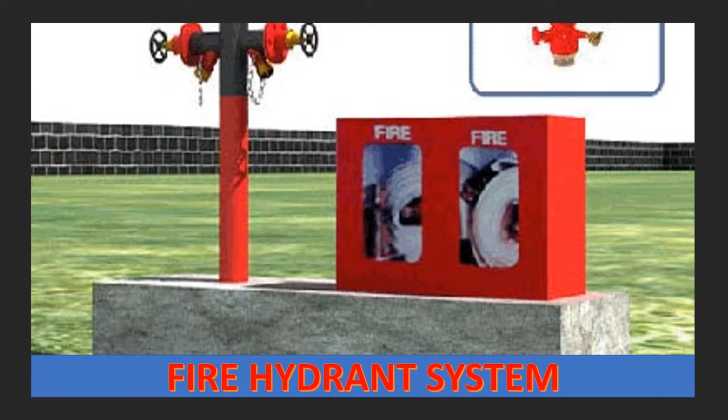From the last few years, fire accidents are increasing widely in India due to various reasons. Ignoring those facts and moving forward will not help us in any way. Let us pause a few minutes and learn the importance of having firefighting system knowledge within us to safeguard ourselves and to safeguard our near and dear ones. Come, let us see in detail.

Due to the repeated fire incidents happening in India, the rules and regulations of the fire departments are amended regularly. So many times fire starts in a small way due to carelessness and it leads to a big destruction. On average, the fire will spread in a big way in 3 to 5 minutes. So the earlier we act, we can protect ourselves and protect others.

Due to the direct and indirect impact of fire, we have lost so many human lives, huge properties and bigger businesses. So let us focus our energy to learn more about the firefighting system so that we can contribute to others in saving their lives as well as their assets and business. Government of India is upgrading the team strength and equipment strength to reduce the loss of human lives, business and property by acting fast to the fire situation.

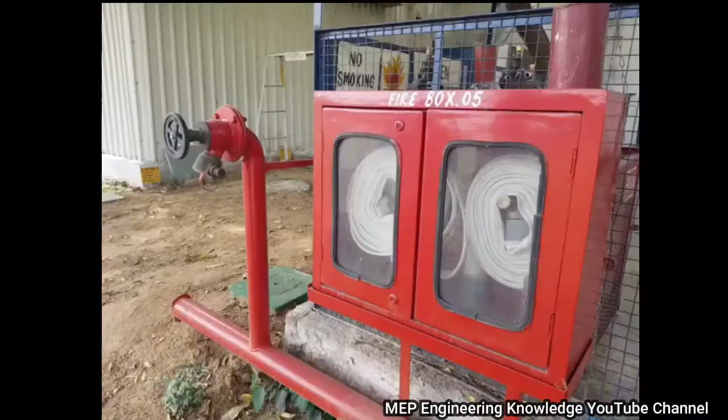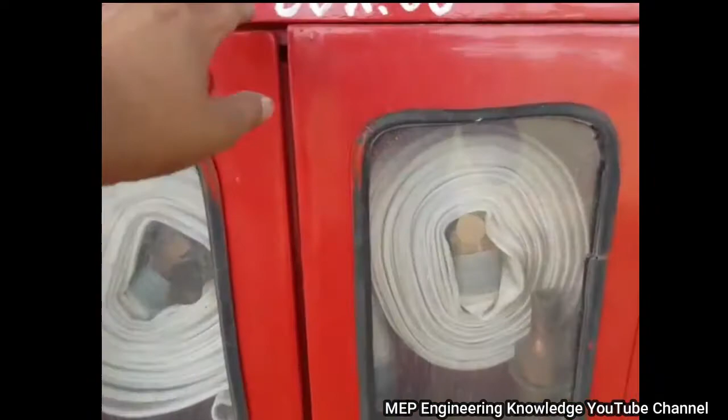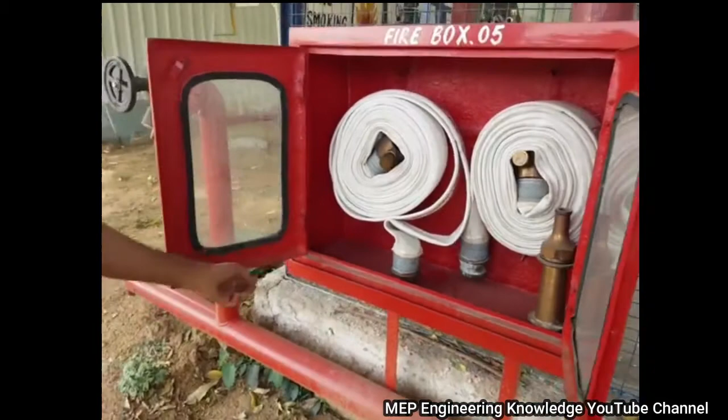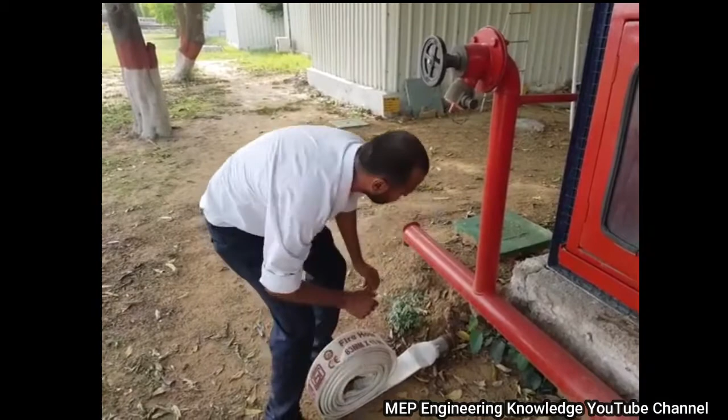Come, let us see a live video of how to use the fire hydrant system. You can see a landing valve. In this landing valve, there is a knob which is used to connect the RRL hose. The RRL hose will always be kept inside the box to protect it from damage and for emergency use. You can see how the RRL hose is taken from the hose reel box, and it will always be kept in a rolled manner.

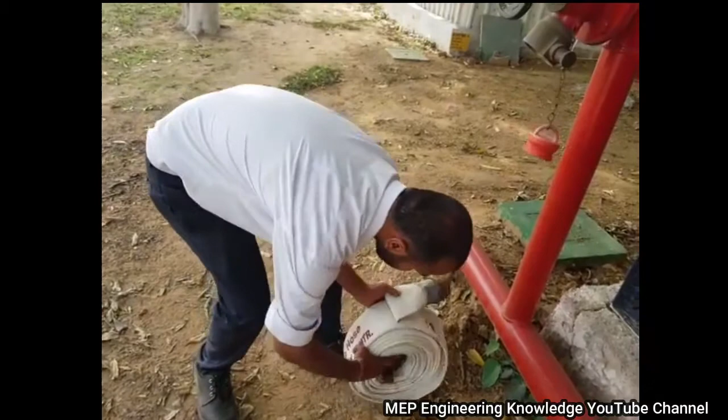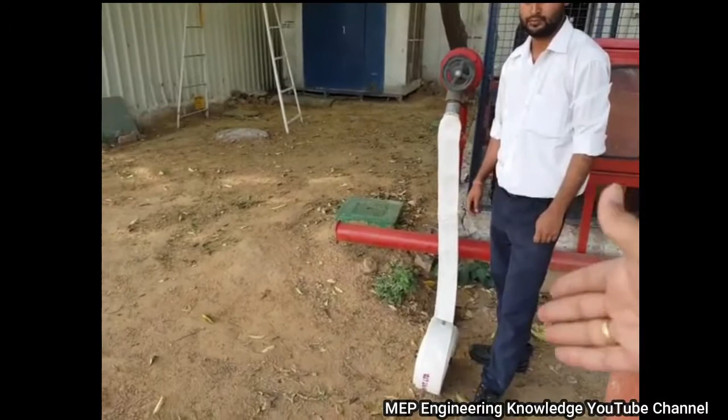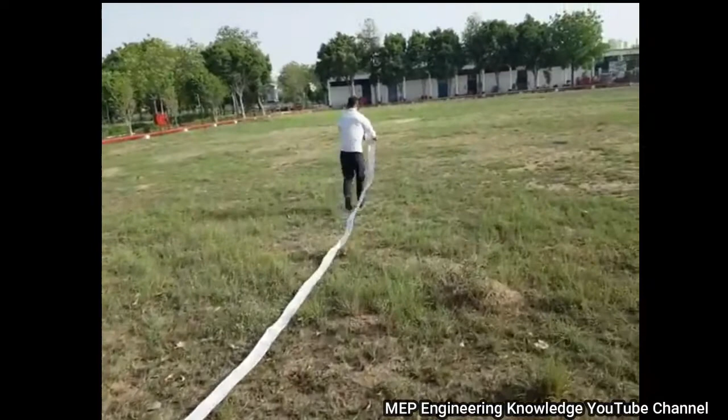So by pulling the lock, you can remove the end cap of the hydrant valve. See, just by pulling the knob, you can press the hose inside the landing valve. Then you have to simply roll the hose, or you can hold it at the center and move on. It will rotate automatically without any twist on the hose pipe.

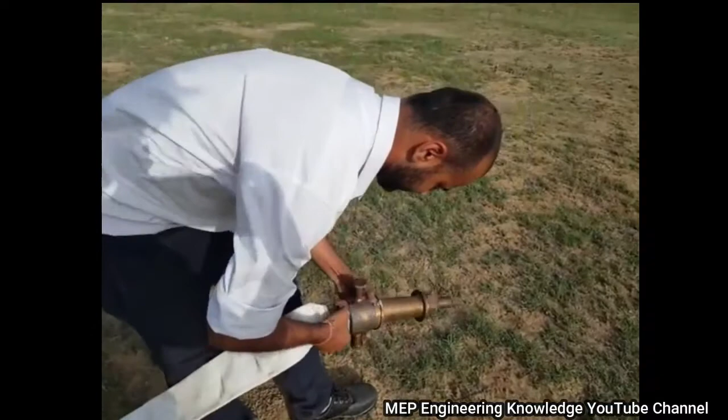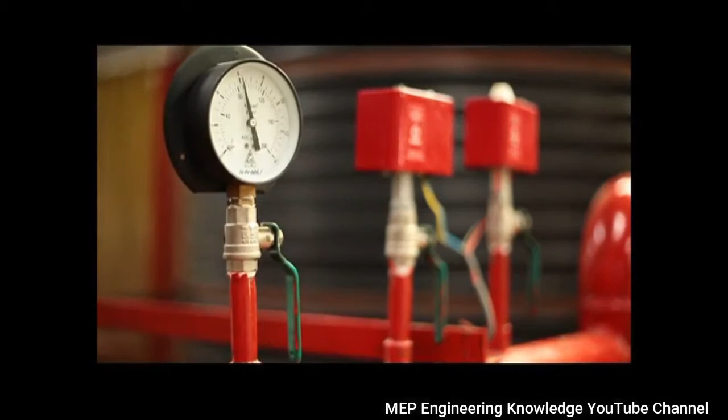This is the nozzle which is kept. Just see how the nozzle is connected to the end of the hose. Same way, you need to pull the lock to insert the nozzle. You can see in close up how the nozzle is fixed in the hose reel. Once the pump is switched on, you can see the pressure is increasing. That can be monitored in the pressure gauge. Here you can see the pressure of the water which is coming out from the nozzle.

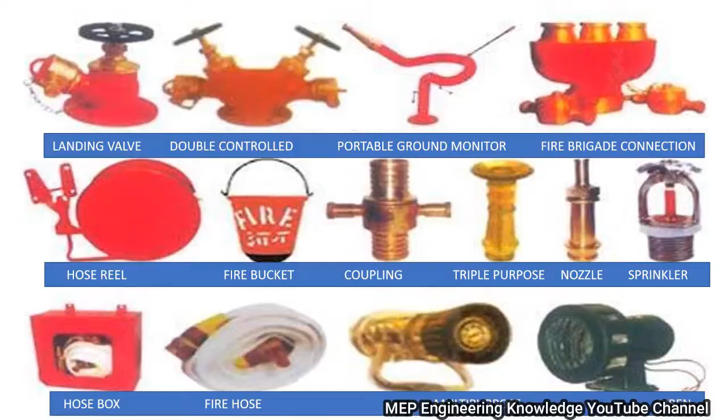To handle the hydrant system, proper training is required. In the fire hydrant system, we have many parts and accessories included. So let us learn their usage and importance, so in emergency time it will help us a lot. Let us see the hydrant system parts. First is landing valves. Landing valves are used in the wet risers in buildings for firefighting purposes. Trained people connect the water hose to the valve to get the water to extinguish the fire.

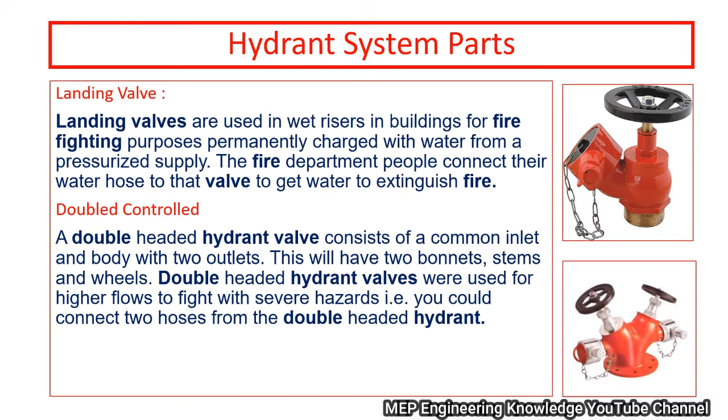Next one is double-headed hydrant valve. The double-headed hydrant valve consists of a common inlet and a body with two outlets. This will have two bonnets. Double-headed hydrant valves are used for higher flow to fight severe hazards. This will be used only by trained technicians.

Fire brigade connection. This will be accessed only by expert trained people from the fire department. The one inlet of the fire brigade connection will be connected to the pumper truck of the fire department. The water from the vehicle will be pumped through this inlet, and from the other outlets the RRL hose will be connected and used to extinguish the fire. The next one is hose reel box. The hose reel box will generally be used to address or extinguish smaller fire events.

So it will be a 25 mm dia hose which you can pull up to 30 meters long. So anybody is able to handle the hose reel to extinguish the fire. It will have high pressure, but it will be in a controllable manner. We will have a valve with which you can control the flow of water.

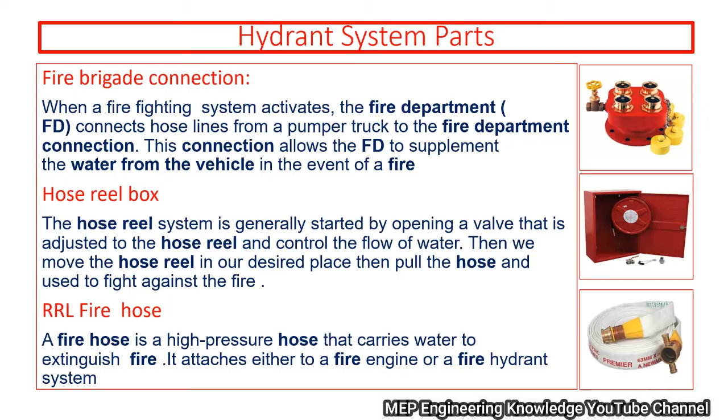The next is the RRL fire hose. This is a high pressure hose that carries water to extinguish fire. So mainly only trained or expert people are able to handle this pressure. So it is recommended to get trained before you use this RRL hose. Available in 7.5 and 15 meter. It will be connected to the fire brigade, landing valve, etc.

Portable ground monitor. The advantage of these units is high water flow up to 1250 GPM, depending on the supply hose and nozzle selection. This can be operated by a man or it can be operated without manual effort as well.

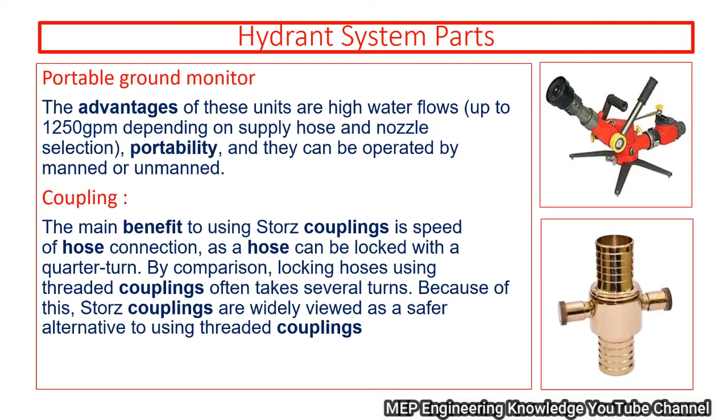Next is coupling. During a fire emergency, we will not have time for threaded couplings. So to avoid the threaded type, Storz couplings are used. This has a lock system. By inserting, you can turn a quarter turn and it will get locked. This will save time and help the expert extinguish the fire in an easier way.

The next component part we are seeing is the nozzle. The nozzle is one of the important parts in the fire hydrant system, to create more pressure and to reach the distance. Due to the reduction in the cross-sectional area at the end, its flow velocity increases considerably so that the water can reach the farthest distance.

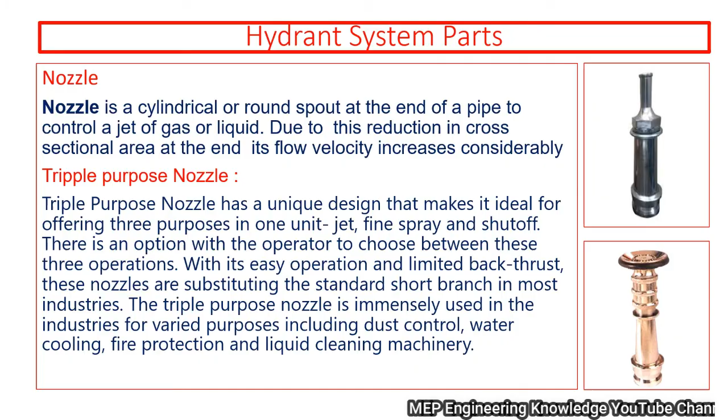Now another one is the triple purpose nozzle. The triple purpose nozzle has a unique design that makes it ideal for offering three purposes in one unit: jet, fine spray and shut off. These will be handled only by the expert trained firefighting team.

The other part of the hydrant system is the siren. A siren is a loud noise making device. When a fire incident happens, the siren will make a noise and alert the people to vacate the building immediately. The next one is the hydrant gong bell. Typically located outdoors, connected to the fire risers, encouraging prompt evacuation and emergency response.

The evacuation time is generally between 7 to 10 minutes from the building. The evacuation time is defined as the elapsed time between the instant that occupants receive an alarm or become aware of the fire, and their arrival at the destination, which is normally a safe location inside or outside the building.

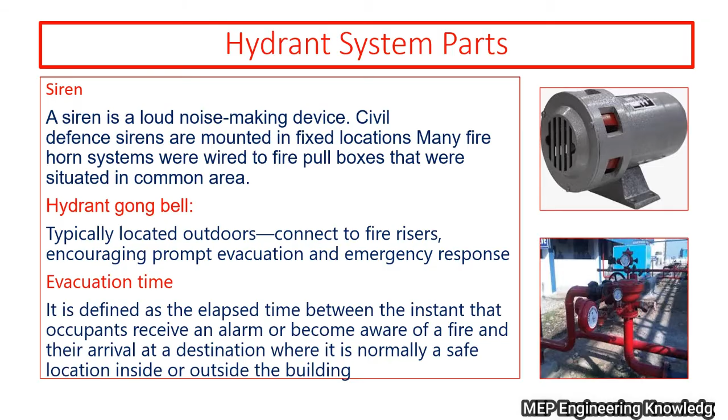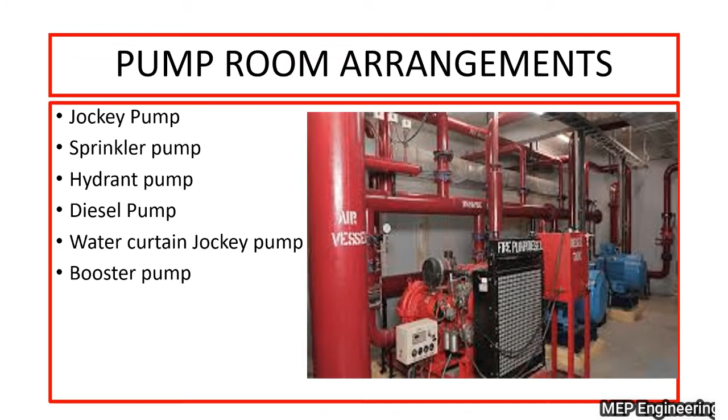Let us see the pump room arrangements. There will be a jockey pump, sprinkler pump, hydrant pump, diesel pump, water curtain jockey pump and booster pump. The booster pump will always be located at the terrace of the building. So this is the arrangement in the pump room. In the next video we will see in detail the technical calculation of the capacity of the pump and the capacity of the water tank to be designed for a particular building.

A small drawing is shown here for your overall understanding of the pump room layout and how the pumps will be positioned in order. Here in this table you can see the pump operating pressures. The jockey pump, sprinkler pump, hydrant pump, diesel pump and water curtain pump are shown here. The jockey pump is the primary pump. When any small pressure drop happens, the jockey pump will try to cope with that pressure drop and keep the set pressure alive.

For example, if the set pressure of the building is 6.5 kg per centimeter square, the jockey pump will turn on when the pressure drops to around 6. From 6 to 6.5 the jockey pump will not respond. Once it comes down to 6 kg per centimeter square, the jockey pump will automatically switch on. And once 6.5 kg pressure is maintained in the system, the jockey pump will automatically cut off.

Whereas the sprinkler pump and hydrant pump will not have a cut-off system. Once they start, you have to switch them off manually. So even after the jockey pump starts, if the pressure is unable to reach 6.5 and keeps reducing, when the pressure reaches 5.5 kg, the sprinkler pump will turn on. Similarly, if some expert opens the hydrant valves, the pressure in the hydrant system will drop so that the hydrant pump will turn on at 5.5 kg per centimeter square.

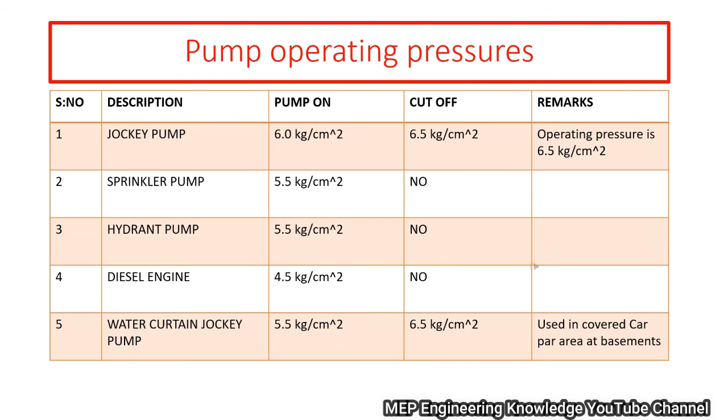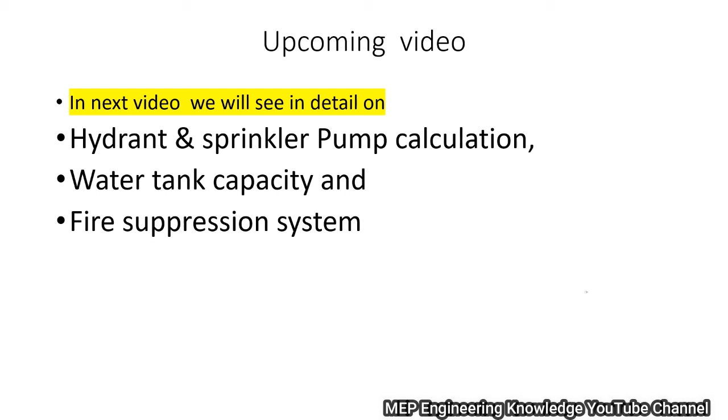Hope you understand the overall fire hydrant system and hope it is useful for you. In the next video we will see the hydrant and sprinkler pump calculation, water tank capacity and fire suppression system.